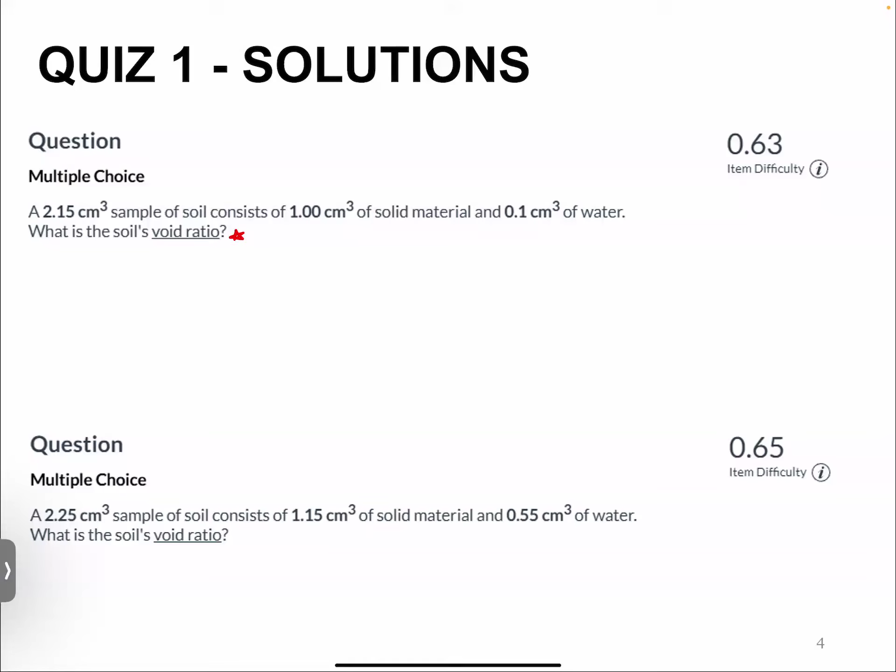Yeah, so with this one, void ratio - void ratio is the volume of voids divided by the volume of solid. So we're given a total volume of these, and then we're given the volume of solid of 1.15 cubic centimeters.

So I'm just going to use this one at the end, even though it's the same. So 2.25 cubic centimeters. And then we're given a total amount of volume of water.

I feel like I snipped something off here, but there should have been a fully saturated - did this question say fully saturated or assume fully saturated conditions? Was this one? I didn't even take a screenshot, I was literally just rushed because I was putting this in there.

Was this a problem that had the multiple choice numbers? You guys remember that? Okay, so there was no one that said like 'none of the above.' Okay, well, I'll double check in this one then, because this could be misleading and that could be my fault, and that could be why this is low - I'm really realizing it in real time.

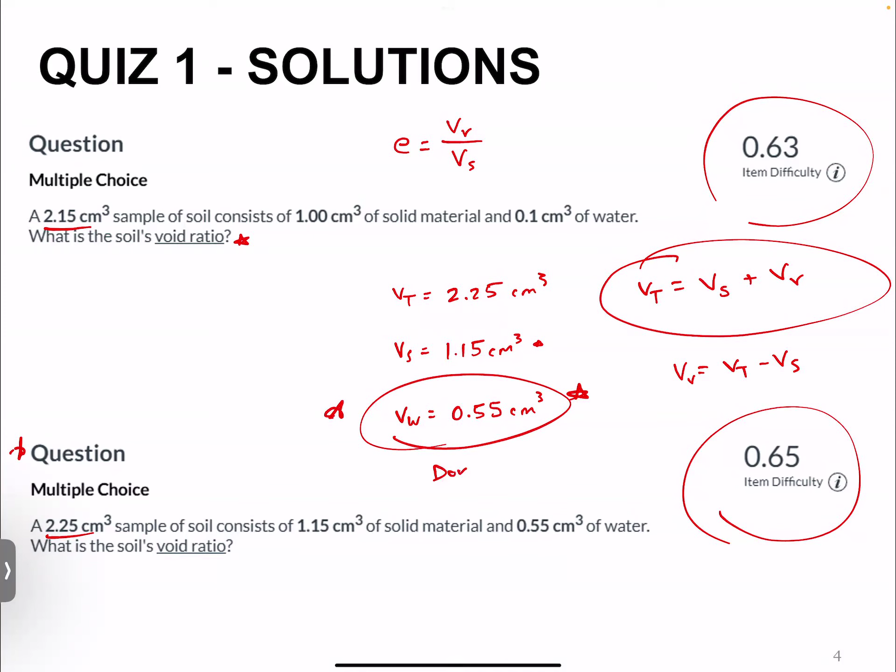So in either case, even though we're given this, we don't really need it for this specific one, because all we need is the volume of void here.

So once we calculate the volume of void from this, we can plug it back into our void ratio equation.

Sorry, it's been a day. I screenshotted this like literally a second before, so it took me a second to remember all of this.

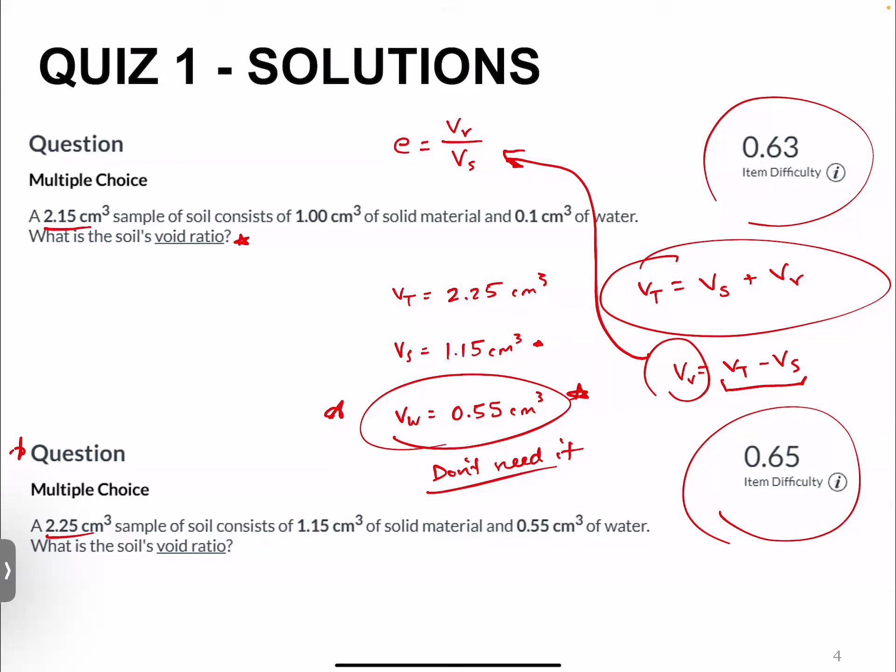All right, is this clear, at least in this part? Cool, cool. All right, last week we ended on... let me just double check and see where we ended.

So we got through one example and then for the phase diagram. Just to kind of recap big picture with the phase diagram: soil is completely different than steel and concrete and other types of similar engineering material, because it is completely variable.

It's all natural most of the time, and there are just more variables within it that we don't control. So in order for us to define things and allow us to use some of these mechanics to establish designs.

And do the engineering stuff in soil, what we need is the ability to define some of the physical characteristics with numbers. So the way we do that is through indexing.

A lot of these are common ones, like densities, void ratio, porosity. We went through those last week. They are all very basic calculations, or very basic numbers, that define the relationship of this phase diagram of soil.

So what we do: we first assume that soil is made up of 3 parts. Even though it really looks different, we summarize it and categorize it into a solid portion, a water portion, and a portion of air.

Remember too, we had some assumptions that this was based off of. So who remembers any of those assumptions we talked about last week? Air, water, and solid, yes, down here, air, water, solid. What were some of the assumptions we made based off of that?

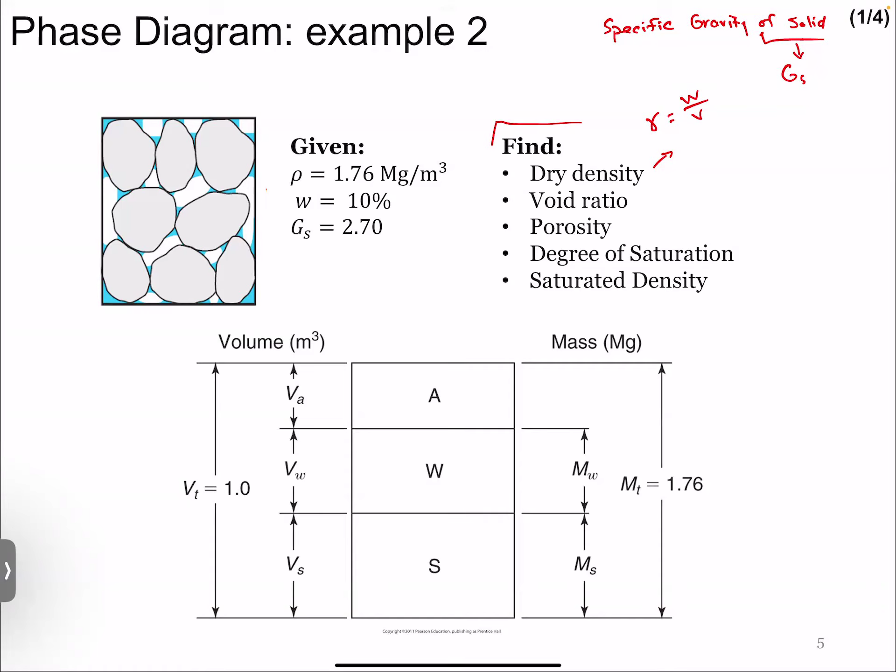This is used a lot in permeability analysis and to understand the flow of water through soil. This is also shown as a percentage, just because.

The degree of saturation is how much water is in the void space, so that's the volume of water divided by the volume of voids.

And then the saturated density is: if we replace all the air with water, what is this new density? Obviously water has more mass than air, so if we were to remove this air and just fill the whole thing up with water...

Then what would be this new density? What would be the new mass, even though the volume's not changing? Yeah, it would go up - it'd be more dense in that case.

So if all of this is super foreign, or you just had a crazy weekend and forgot all of it, please remind yourself or refresh. As I said, we're going to be on this topic for a little while, and then we'll see how these indices are used in design.

But we ended with one example problem last class, and we will do the others here.

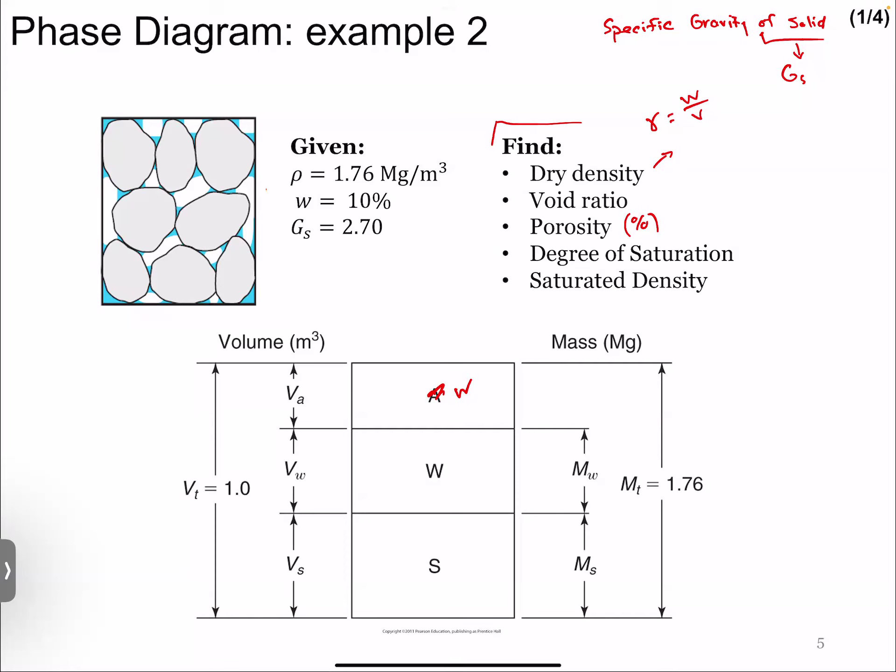So let's do this example problem here. Did we end on this one? I don't think so - we only did one example problem last class, right? Okay, so let's do this one here.

So what we are given is the density, but it's in this weird looking rho thing, which means our units are in everybody-except-American units.

So we are in megagrams per cubic meter. Our moisture content and our specific gravity are shown. We're asked to find dry density, void ratio, porosity, degree of saturation, and saturated density.

So first and foremost - what did I say last time is the first thing that we should do? I mean, convert or just make sure you know what units you're working in. Why do we care? What's the variable that I said is mixed up a lot?

You're dividing by like 62.4 divided by... yeah, exactly. So the unit weight of water, or the density of water - that's going to be the thing in any one of these problems. Any geotech problem, you're eventually going to need to use the density of water or know the density of water.

So make sure you use or write down the correct one at the beginning. So in this case, the density of water is what? Yeah, 1,000 kilograms per cubic meter, or in this case, 1 megagram per cubic meter.

That helps because we know specific gravity is density over density. So always try to match whatever units your density is given in automatically.

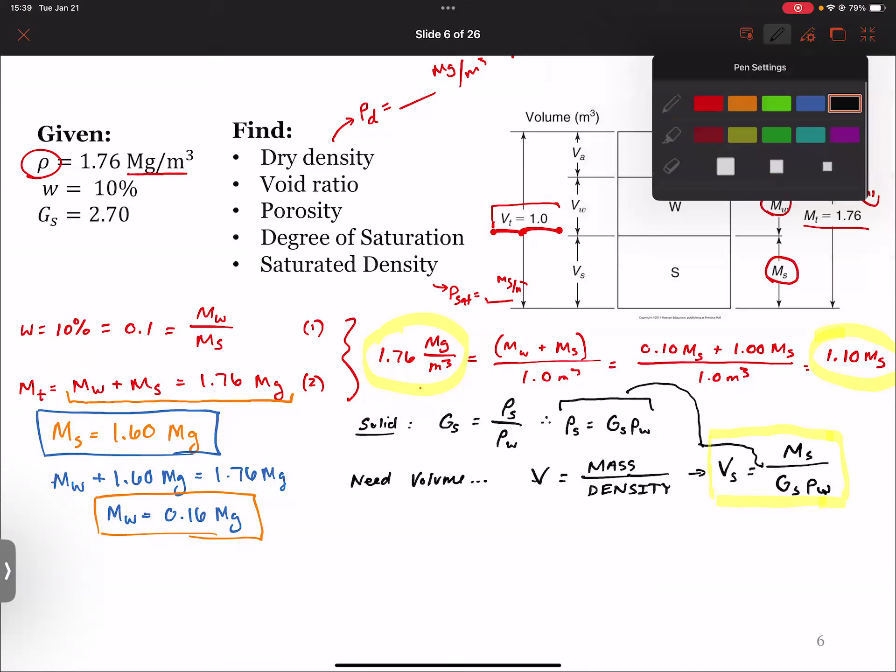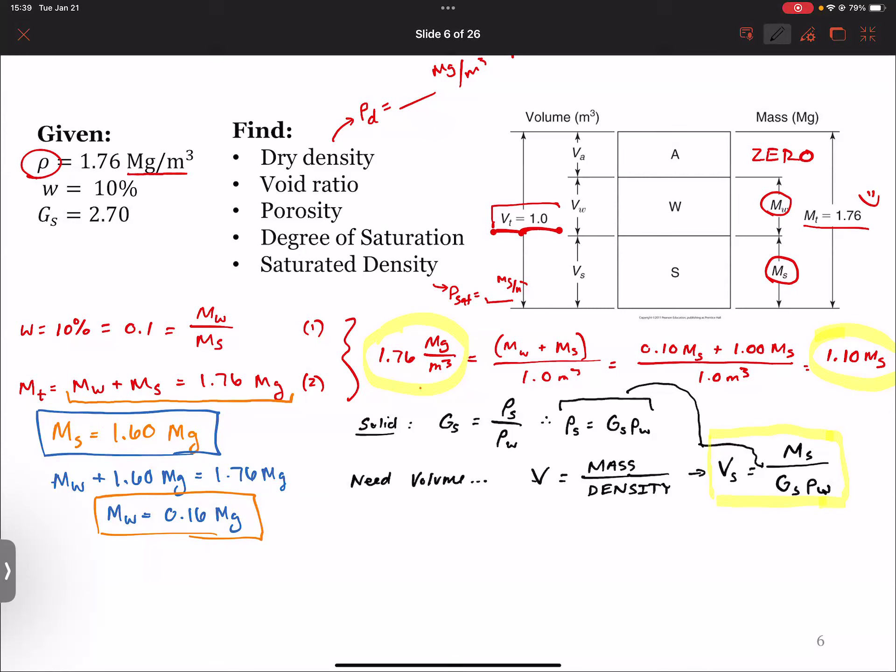You'll see this equation in this form a lot, but what I'd recommend is not trying to memorize that equation, more so just memorize how to get to it. All it is, is the volume is mass divided by density, and the density of our solid is the GS times our unit weight of water. In our units it doesn't matter because it's 2.7, since we're using SI units. But if we were using US units, that number would be different because we're multiplying the GS times 62.4.

But for this case, this equation looks a lot prettier. So volume of solid, VS, is equal to 0.593 meters cubed.

And then we can do the same for the volume of water, which is just the mass of our water, which we just found. So now we have solid and our air. We can find our water and our solid, and we can find our volume of air because we know the total volume, and then we know the volume of solid and the volume of water.

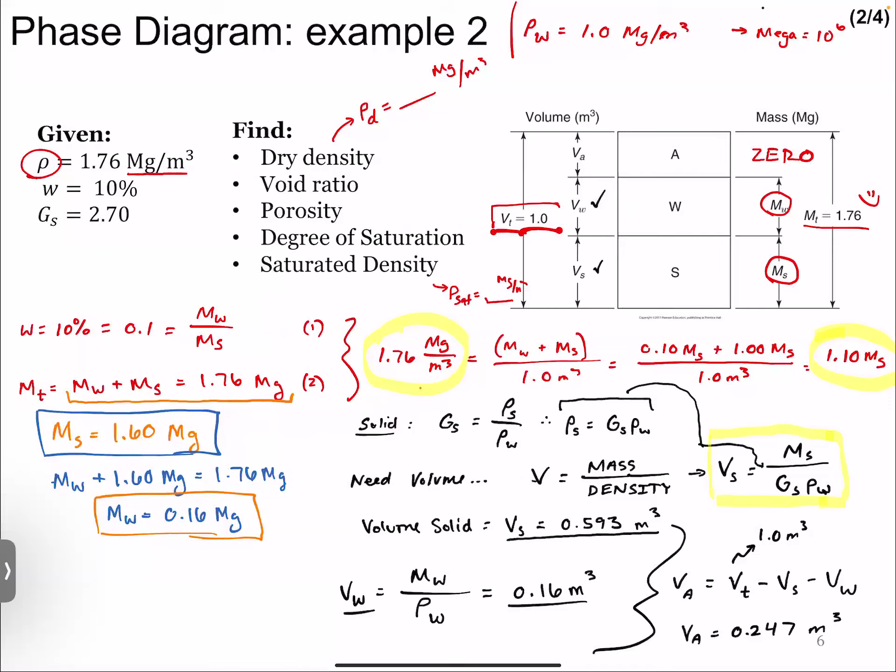Okay, so now you'll see up in the top right, we have all of our things completed. The only thing I didn't show was how to calculate this, but hopefully it's pretty clear from our little diagram - the volume of void is just that air portion plus the water portion.

So the volume of void is just the volume of water plus the volume of air. Just from the little diagram here, you see the arrows are just those two on that part.

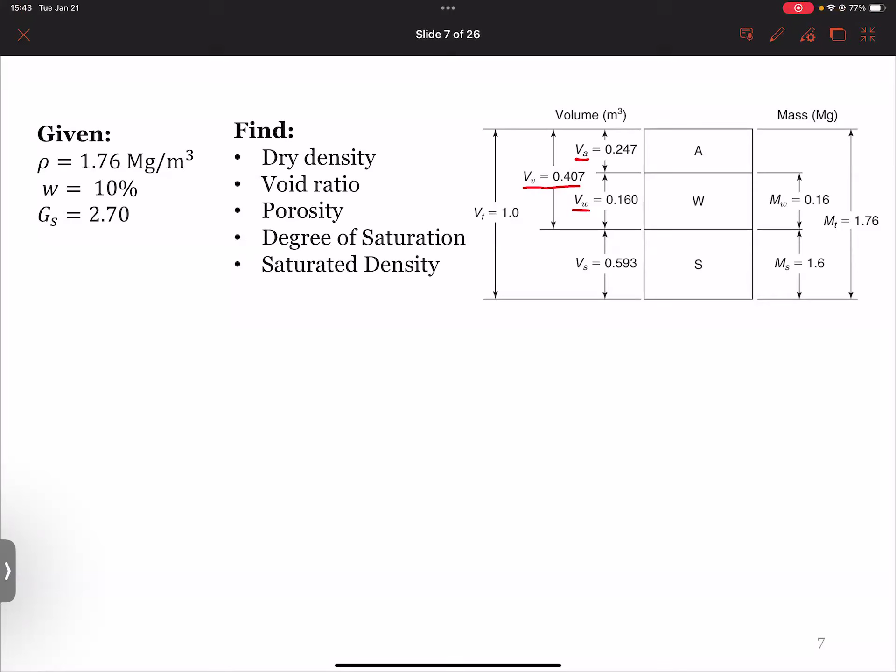So now all we need to do is find the values, like the indices that we're asking for. Once we have everything complete here, let's go ahead and solve for it. So our dry density, the first part, that is our mass of our solid portion divided by the total volume.

So dry density is telling us, if we were to remove all the water, what would be the density of this material? The solid portion is the only thing that has mass, because the air doesn't have mass. And the total volume in this case, again, it's nice units here. So this would be 1.6 megagram divided by - I'm just going to show this because in this case it's 1, but it might be something different - divided by 1 cubic meter. So our dry density is 1.6 megagram per cubic meter.

Okay, so our void ratio, remember this is shown as E. This is our volume of voids divided by the volume of solid portion. So our volume of voids is 0.407 cubic meters, and our volume of solid down here is 0.593 cubic meters. We're both in cubic meters, so that's good, those cancel out, and we get a nice 3-digit decimal place, 0.686.

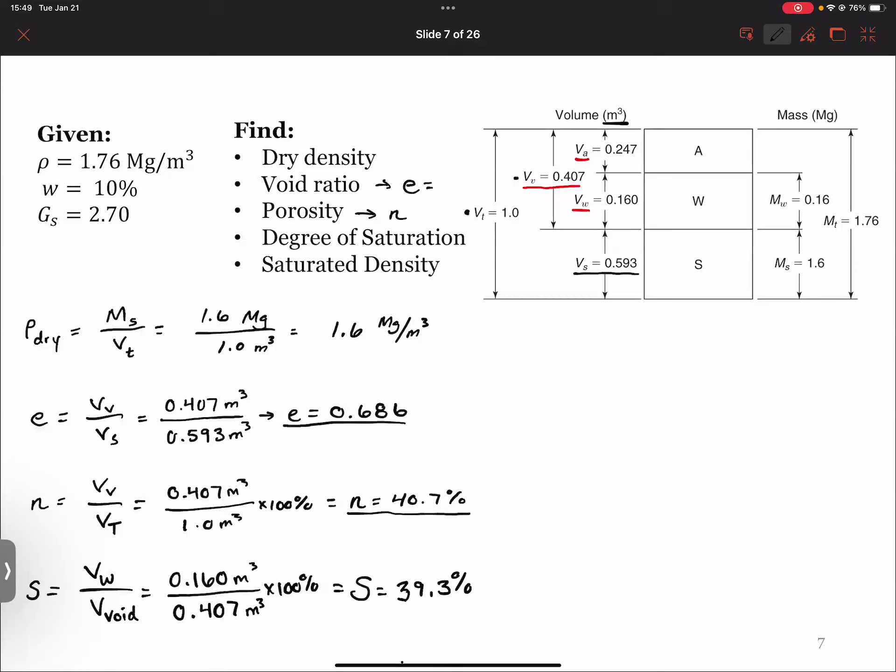So the only other thing that we have to find is this saturated density. Now this one's going to require a little bit more thought about what this value actually means to calculate it. So I'm just going to go to the next slide. You can complete it there if you want, but just so I have enough room to write, this is the 4/4 in the top right that you should have.

So what our saturated density means—you'll never guess this—but it's the density when the degree of saturation is 100%, which is crazy, right? Blows your mind. Saturated density means density when the degree of saturation is 100%. So this means if the degree of saturation is 100%, this means our volume of water is equal to our volume of voids, which again means that the volume of air is equal to 0. So there's no air here.

So I showed this equation earlier, but what this means here is our saturated density is the mass of water—but I'm going to put a little asterisk here because it's the mass of water when all of our void space is filled with water—plus obviously the mass of our solid, divided by the total volume portion. So this mass of water is if, or maybe when, the volume of void is completely filled with water.

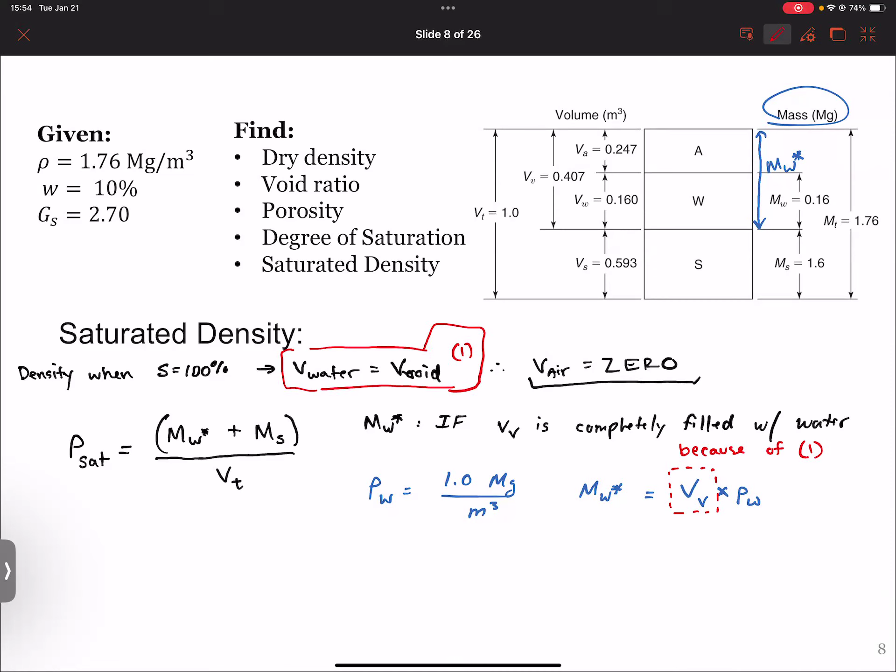Because of this equation here for saturated conditions, this equation is easy to fill out though. So our mass of water when we're 100% saturated, and it's nice because our density of water is 1, is just equal to our volume of void.

0.407 megagrams. So what we can do now is actually plug this in, plus our mass of our solid, 1.6 megagrams, divided by 1 cubic meter. So that'll be our saturated density.

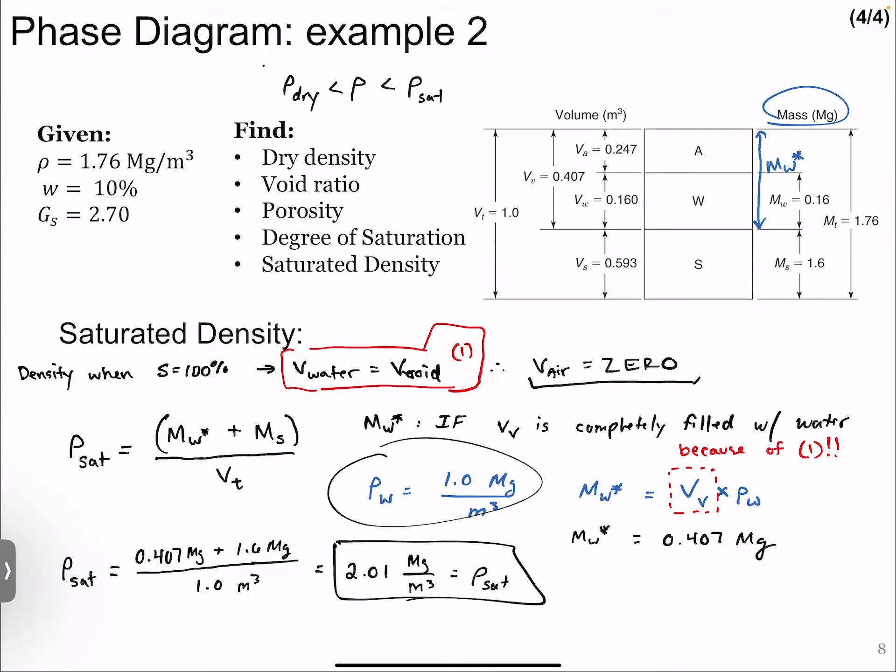Remember, saturated density, we're adding more mass, so it should always be a larger number than our dry density. It should always kind of go like this: dry density should be smaller than our normal density, which should be smaller than our saturated density. Same thing if it's gamma, same thing if it's unit weight, not density.

So think about this. If you have questions, let me know right now, but think about this whole thing, because this is an important concept where this saturated density is assumed because we have saturated conditions. So don't try to memorize that equation, think more so about why it's like that. Why do we care about this saturated density?

A lot of times we would still calculate the saturated density based off of the groundwater table rising. So let's say right now you collect a soil sample 5 feet down, but it's not in saturated condition. What would happen to that density? What would happen to the weight that it places if it's saturated?

Another case would be, not only for current in situ stress, but also loading. Let's say we're building a structure that has to put like 6 feet of fill on top of it, and there's some structure underneath it, like a utility line or an old tunnel, that this 6 feet of fill could potentially break. So the soil coming in might have a normal dry density, but in Florida, what happens if it rains? That could become saturated density, and then that could be too much mass that then breaks our tunnel underneath it. So you'd usually account for it, especially in Florida, just in case the groundwater changes or it rains.

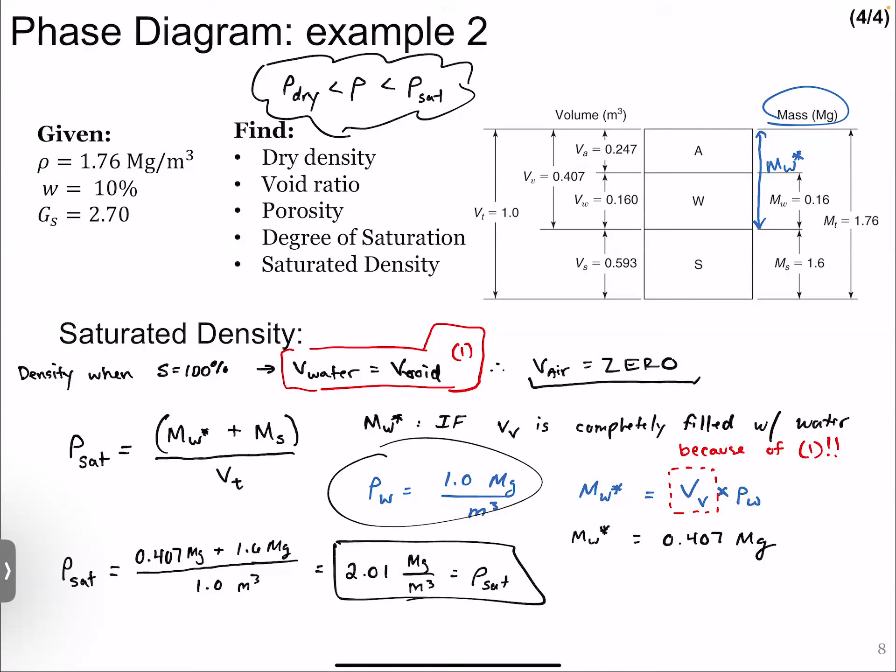Okay, so we're going to continue on in this kind of thing for this lecture. Again, that was the lecture notes from last time. So same thing, and I kind of already covered this stuff, so I'm just going to go really quickly. But if you want these, these were those assumptions we talked about at the beginning. Homogeneous, which means the solid portion is the same throughout, and also the solid is non-absorbent. So those are the assumptions we do for our phase diagram.

Density is a huge thing. Density is a huge thing that allows us to...

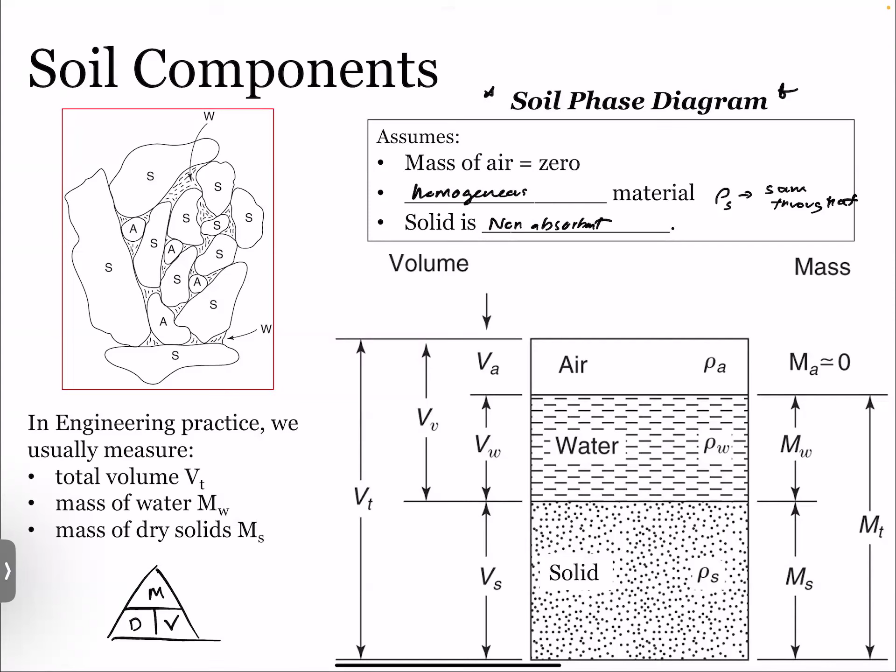Did anyone actually see this in grade school, that density triangle, or did this just shape my childhood? You did? Okay, maybe it was like a Magic School Bus thing. I don't know if you guys were too young to watch Magic School Bus, but could be a Miss Frizzle patented thing. That's like one of the things I can't wait for our toddlers to be old enough to actually watch and appreciate, or they're just going to make fun of it completely. But that show, solid. Bill Nye, oh, I still tear up when I hear that. One thing though, Reading Rainbow, anybody? No way, dude, that was a little too creepy for me, but that's why I'm an engineer, because I did not like the reading side. LeVar Burton. Anyways, okay, tomorrow's a snow day, so I don't want to do it tomorrow.

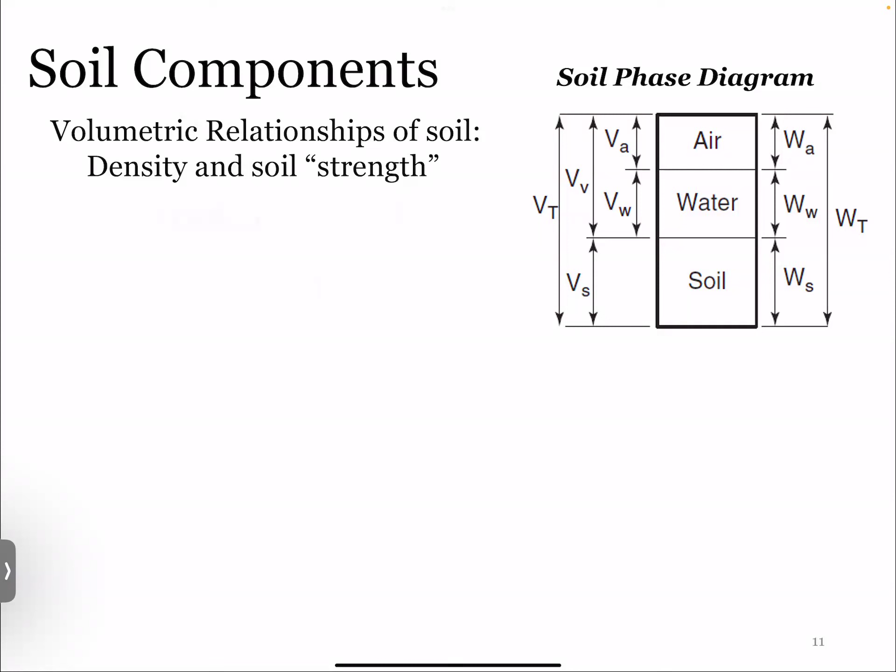Okay, so this is all back like makeup stuff from last time too. Talked about these and which ones make sense, which ones do not. And then I shared this here too at the end. This is if you were to print one slide out and put this on the front of your notes, or hang it on your wall, or put it on your mirror so you see it every morning. This is one that would be very helpful to do. Because remember, all of these numbers make sense, but you're going to be calculating these numbers and these equations quickly, either in practice or during the FE.

Understanding the typical ranges, as well as the units, is important too, because that's going to help you notice you made a mistake, or potentially made a mistake, before you get knee deep into the calculations and all the analysis and design work, and then realize one input parameter is wrong. So understanding the typical range and physical values of degree of saturation, porosity, void ratio, the different ranges there, especially this little section, will help you tremendously on the FE.

I think we'll go over void ratio more in depth later on, but the point of it, since it's dimensionless, is you can use it in different equations. It helps, like I mentioned, correlating it to a scale, it allows us to compartmentalize different ranges of behavior. So 0.1 to 0.5 experiences this behavior, kind of how a hurricane scale allows us to communicate. It helps in communication, it helps in equations, but it also helps us scale from a laboratory setting, where we're testing a little piece of sample, to an actual large field or whole site conditions.

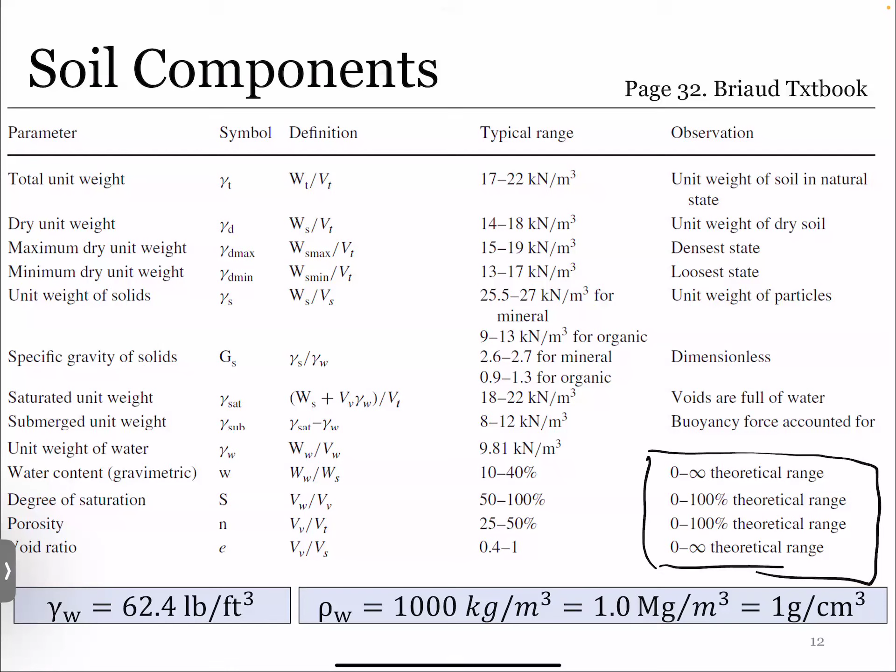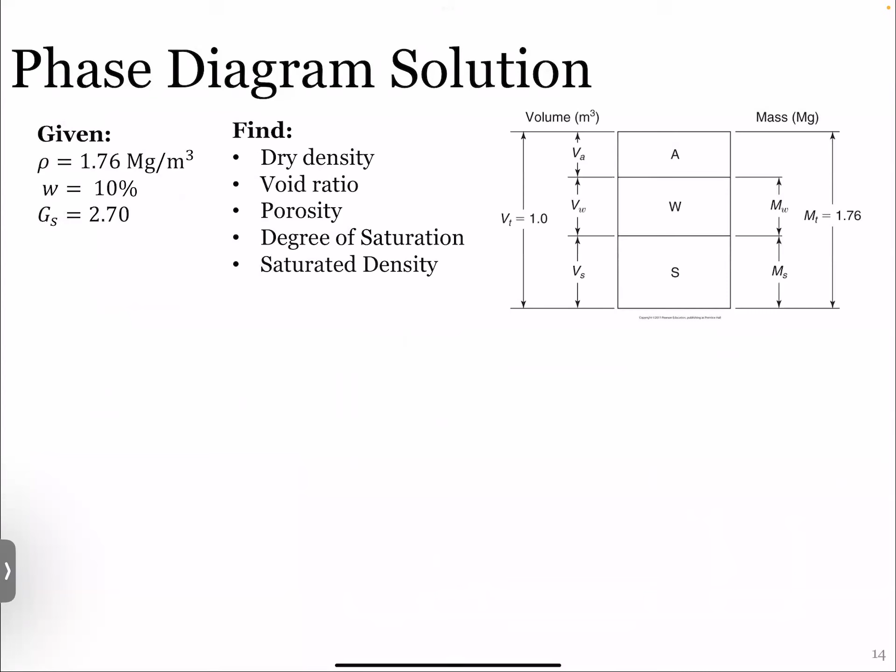Okay, let's see, did I go over this one already? 1.76 - I may have just copied the slides over to the wrong spot. I think that was the first one we went over. It just looks a little bit fancier. Yeah, that's the one I just went over.

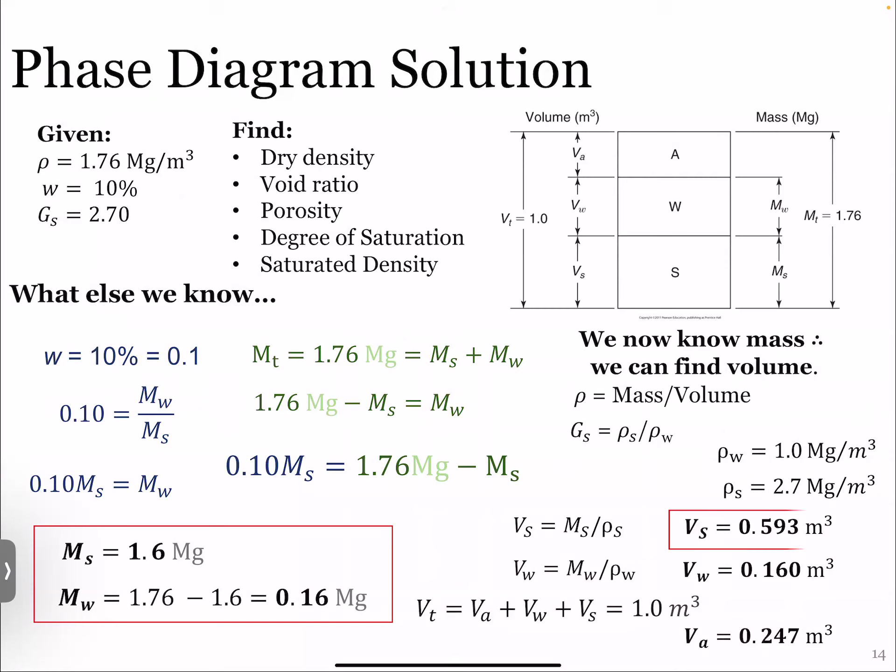So that's the same thing that you just wrote. Sorry to include you - if you saw that ahead of time, then good for you, but if you didn't, then you got some writing to do there. So yeah, these are all the things we just went over.

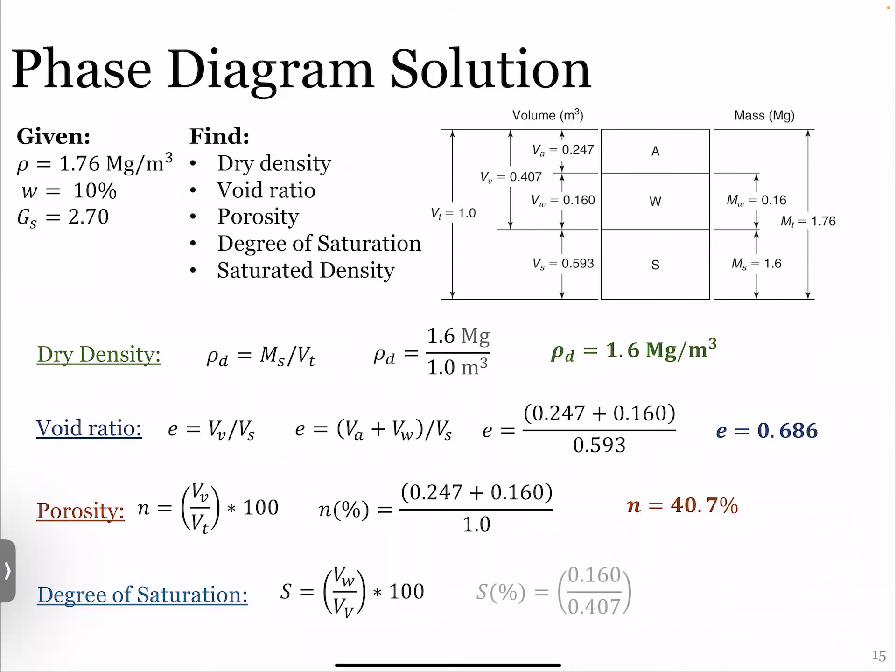If you missed my writing at all, you can put that in there. Let's look at an alternative solution to solve this one though, one that might be potentially easier. In this case, remember in the last one we just did, we were given the density, and we assumed a total volume of 1 and then a mass of 1.76.

The page here. So let's look at an alternative solution. I used to have a picture pop up of Blink 182 right there, but now they're not alternative anymore - it's like coming back.

So again, this is where I was saying the phase diagram - the whole point of it is to eventually fill everything out so you can calculate these things. But there are different ways to get there depending on what's given, and also depending on how your brain thinks. So what we can also do is assume a volume of solid of 1 cubic meter, or just one anything. If we were working in cubic feet, you could do this at the very beginning. So let's go through this right here now.

If we assume a volume of solid of 1 cubic meter, what would be the next step, or what equation here could we take to help us solve for the next thing? So we could do a few things. First, what we could do is find the mass of our solid if we assumed a volume of solid of 1, because we're given the density of solid, because we're given the specific gravity of 2.7.

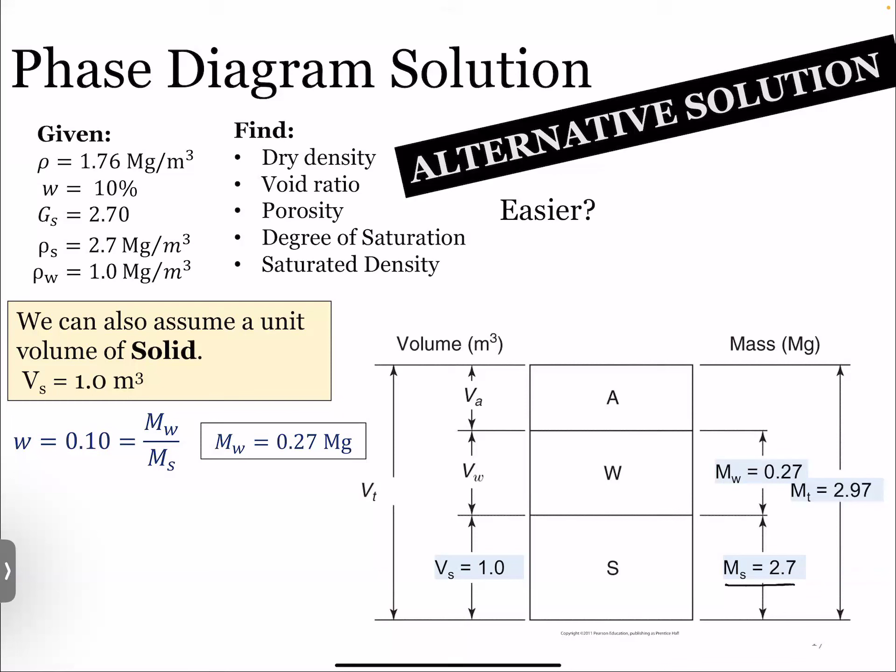So we can find our mass of water that way. Now we can also find our total mass, because remember this is 0. The air portion is 0. So we can find our total mass of 2.97. So 2.7 plus 0.27, everything else is 0 there.

And so we're almost going backwards, where now the only thing we need to find is our volume of air, but we also need to find our total volume. Remember, last time, the first thing we did was use our density up here. But now we're going to use our density based off of the calculated total mass to find our total volume.

So our density that was given to us is our mass divided by our total volume. So our total volume, which is now calculated, in this case is 1.688. So at the end of the day, all of these should be the same because they're all scaled differently. It's just depending on where you start.

Now, what's the apparent benefit of going this way? Yeah, we get the total right off the bat, but also we never had to set up those two systems, those two equations, two unknowns, remember? Which is perfectly fine, we get the solution that way, but this allows us to set up and just kind of go one by one.

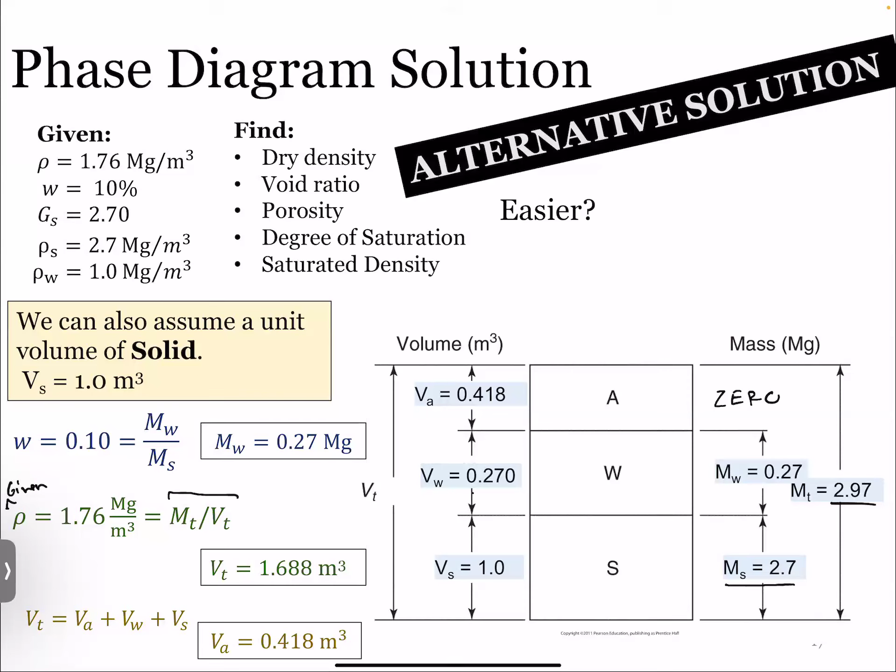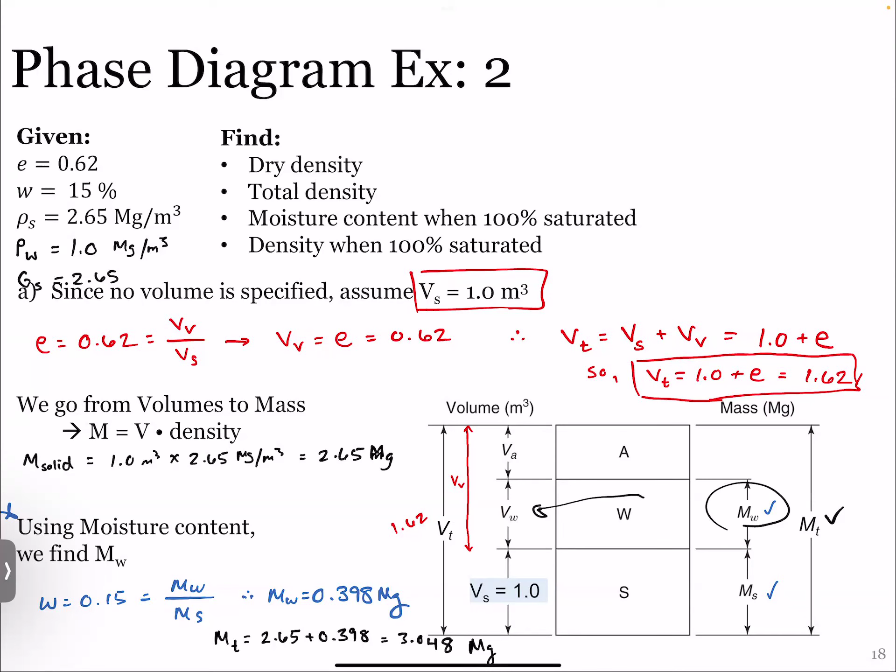So on the next page, we'll start calculating this dry density. For our dry density, we know that's going to be our mass of solid divided by our total volume.

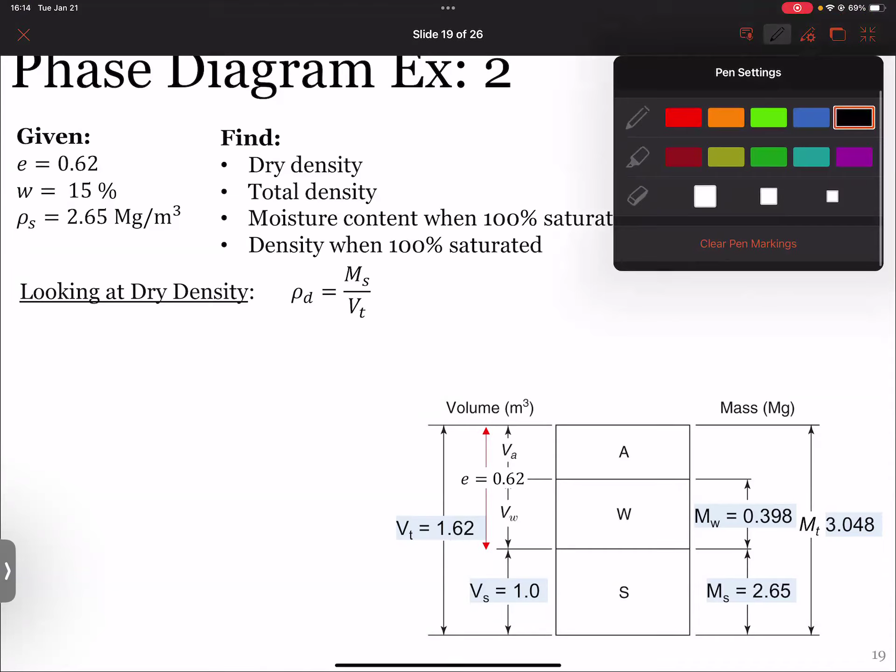Now, since we assumed this Vs equals 1, our mass of solid is just equal to the density of solid, and our total volume is equal to 1 plus our void ratio. So again, total is 1 plus here.

So let me add this here. Since our volume of solid is 1, technically this is times 1.0. So this allows us to make this helpful equation: our dry density is equal to our density of solid over 1 plus our void ratio.

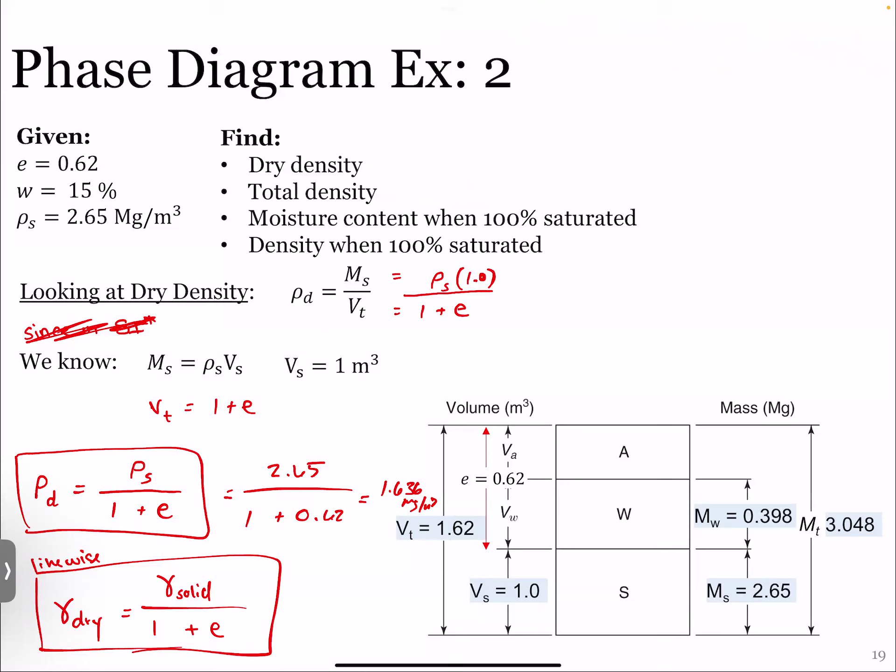But keep in mind, the reason why we're doing it separately here is if we assume Vs is equal to 1, then what we can do is set up equations to act as what I'm just going to call a shortcut, and this is all because of the void ratio. This is again explaining why we care about void ratio sometimes over the porosity as engineers—this void ratio will allow us to correlate to some of the densities. So just like how this equation here, if we knew our specific gravity of solid or our density of solid and we found void ratio, then boom, we could find the dry density right here. Or vice versa, if we knew our dry density and our solid, then we could find our void ratio. So we're going to be setting up equations that look very similar to this that will allow us to either check our work or allow us to calculate it, if we're not given all of this information up here.